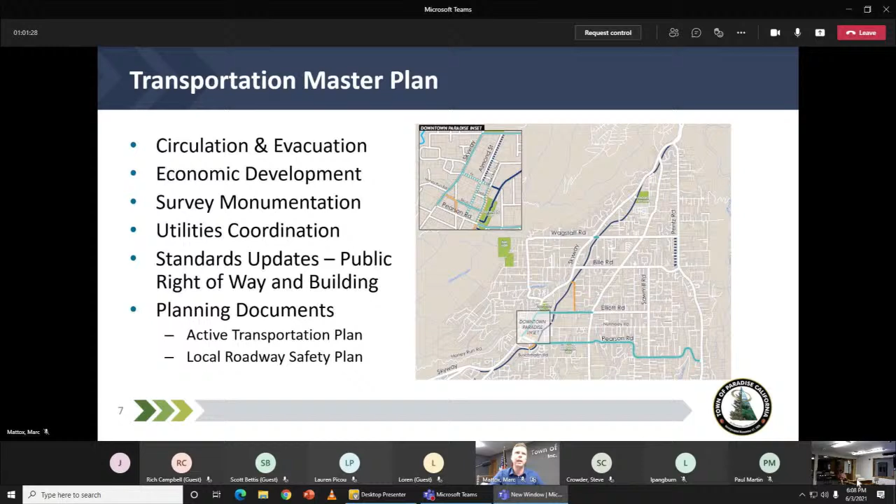Some additional scope of work we were talking about before the meeting started is that it's not just roads—there's so much that goes into economic development. We're going to have improvements for survey monumentation, get ahead of utilities coordination, update standards for both buildings and right-of-way, and create some very unique and critical planning documents that will further enable us to bring funding back to Paradise.

So at this point, now we have the long-term recovery plan and the EDA grant, and now I want to get into how our projects are delivered, and that really falls into two major categories. One is fire emergency response—what I mean by that is the projects it took to get the town open during evacuation, those critical 3 to 4 weeks of response, including culvert repairs, hazard tree removal, and other projects.

So that process isn't very simple, but it happens very quickly—that's kind of a unique process. And for everything else, there really are no shortcuts on how to deliver recovery projects and our standard projects.

So a lot goes into that work, starting with preliminary investigations, project approvals, conceptualizing the projects, performing appropriate environmental reviews for both CEQA, the California Standard for Environmental Review, as well as NEPA, the national equivalent, preparing design documents, plans, specifications and estimates, securing right-of-way—whether the town has adequate property to perform the work for that specific project—and utilities coordination. Our environment for utilities is more unique than anything I've ever heard of for an entire community, so we're navigating those waters.

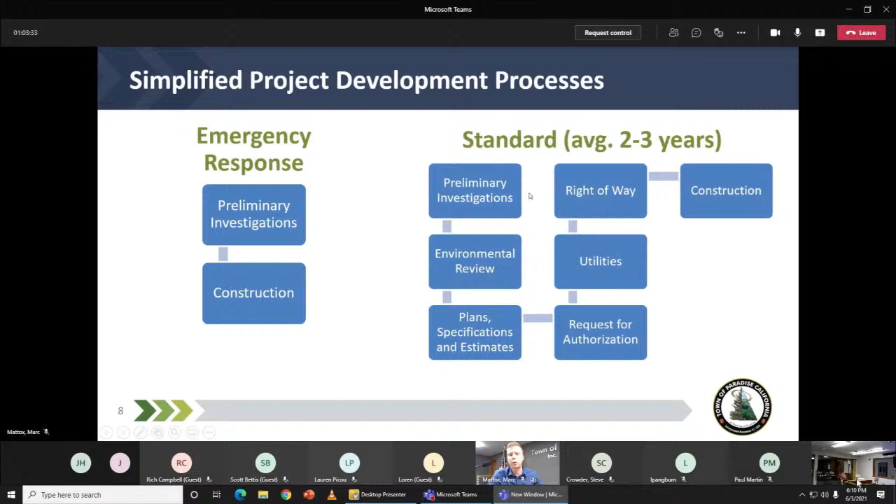Next in the presentation, I'm going to highlight our infrastructure projects, and I'm going to separate these into categories, only because it's easier to comprehend the sequence of how they were developed in a chronological manner: pre-fire, emergency response, permanent repairs, and recovery.

Pre-fire: Skyway at Black Olive signal. This was completed summer of last year, but it exists in our capital improvement program. This was a grant-funded project that installed the signal at the four-way intersection for safety, and we've been very pleased with the outcome of that project, and heard a lot of great responses from those turning left to and from Black Olive Drive at Skyway.

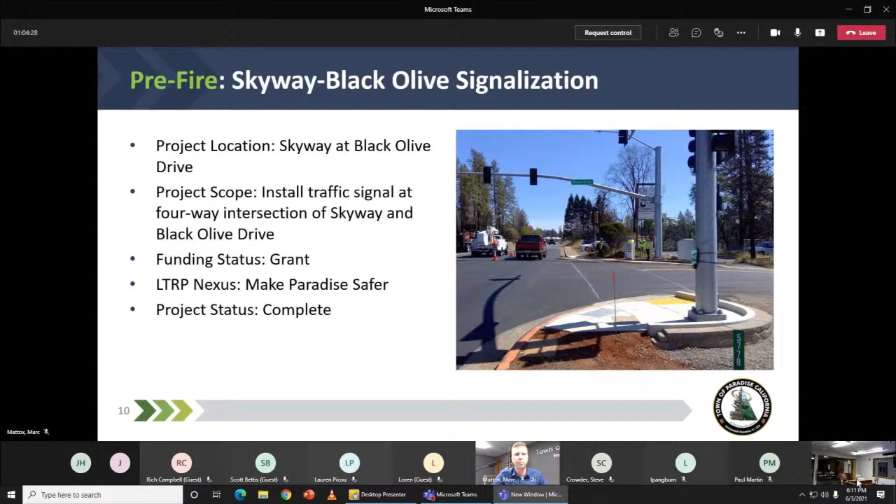Now to where we're under construction: our pre-fire Almond Street multi-modal improvements project. I don't love the name of that project, but I do at the same time, because so much is going into it. It's not just roads, not just sidewalks or lighting, it's all of it. This is the most complete project the town pre-fire would have delivered over the last 30 years. It's about $8 million with mostly grant funds.

I'd love it if you saw this on Facebook, we have drone footage, and I want to credit Rebuild Paradise Foundation for providing this video. We're so grateful for their efforts in the community and providing this footage, taking a bird's eye view of the project corridor for Almond Street.

It's all the way from Pearson to Elliott Road. As you fly over, there's not much activity at this point, but what we're really excited about is doing a few repeated flights as the project develops. I invite you to that vision of a complete street and infrastructure that supports a downtown and thriving businesses, and throw in a sewer, we're going to have something really special.

With this project, you can start to see coming into view the storm drain work, getting rid of those open ditches on the roadside edges. Once the underground work is done by the town — and we're so grateful for PID also coordinating their water line replacement effort — we're going to install sidewalks, curb gutter, drainage, lighting, landscaping, and bike paths. It's just going to be a really beautiful corridor and serve the town for generations to come. I love seeing all the green trees, I know we all do. That project's under construction, and I'm really excited for it to be moving forward.

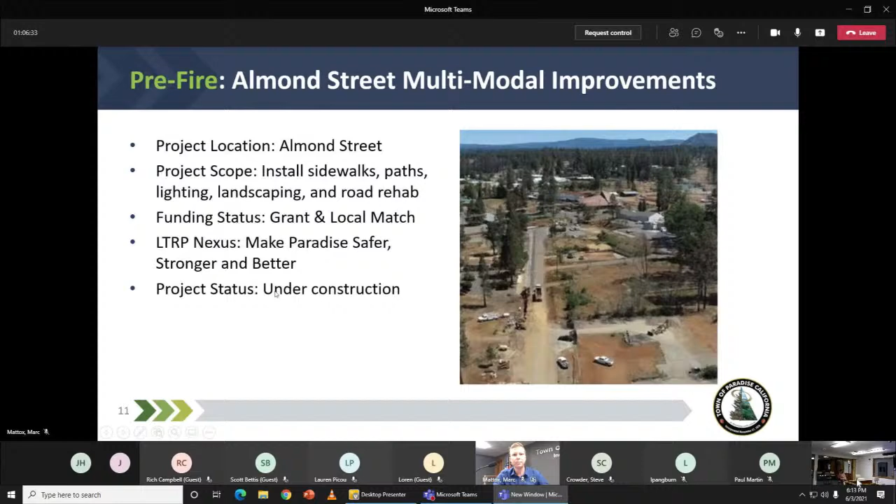Back to the presentation, I'll tie it in with the Paradise Gap Closure Complex. This is essentially filling in the gaps of that infrastructure. We secured Almond Street first, and as I said the other day in our Measure C or Measure V meeting, when good things start happening, it's easier to build and you gain this momentum. So pre-fire, on top of Almond Street, we were able to secure grants for Birch, Fir, Foster, and Black Olive in that downtown core for the same scope: sidewalks, paths, lighting, landscaping, and road rehab.

That's fantastic, again through grants and local matches. We're so grateful that the long-term recovery plan nexus still points back to making Paradise safer, stronger, and better. Both of those projects are under construction.

We're experiencing delays for reinforced concrete pipe, but we're still on schedule at this point, understanding that completion isn't contractually obligated till spring of 2022. But we've got great local partners in Knife River Construction, and their contracting subs on the job are aiming to get this done before the end of the year.

I'd be remiss not to mention Party in the Park is still on, and I hope you can join us starting the 16th. But expect some different landscape on availability for on-street parking. We're working on proposing additional gravel areas on the other side of Pearson Road near Joyland's Candies on the old Jeffords Building property. So we'll have a couple of different options, but be prepared, bring some water, you might have to walk a little longer than you normally would, and we'll have special designated ADA parking at the north end of the park in the gravel area.

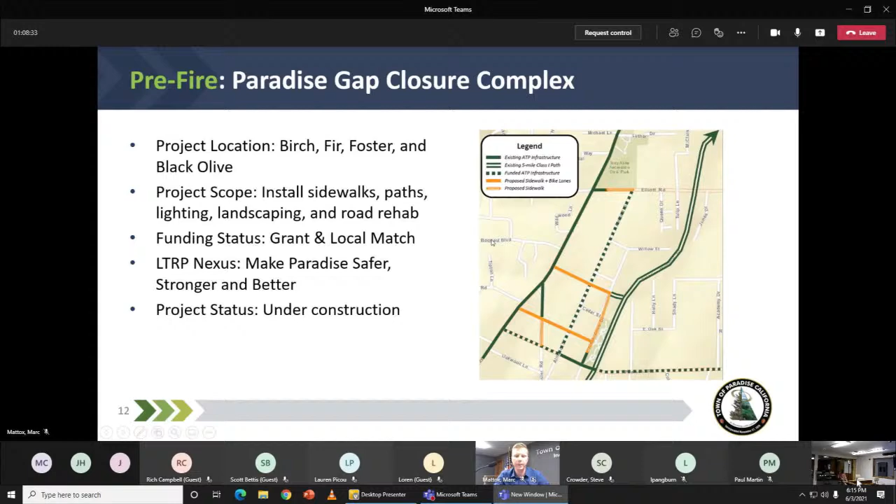Getting back to the projects under construction, our Pentz Road Safe Routes to School project, formerly known as the Ponderosa Elementary Safe Routes to School project. We're so grateful for this effort as well.

Another grant funded with minor local match, installing a multi-use pathway on the school side of the corridor. After the fire, to be quite honest, we weren't sure quite when this project would be delivered.

We're so grateful for the California Transportation Commission and Caltrans who stood by the town and said, you delivered this project on your schedule. We're here for Paradise. So it wasn't our first priority in getting this under construction.

When we were coordinating with Paradise Unified School District, they identified their intent to reopen this facility in a new and improved manner, with so much construction going on the school side. So it's really something special that we're all working towards for a grand opening later this year in August.

Both the town section in front of the school to be complete, as well as the school to have their work done on the facility, really welcoming those students and providing excellent education for our community and our children in the town.

What is also special about this project, I'll mention on the scope, is that multi-use pathway here, and you see this as kind of the first effort of widening in Paradise, and that's kind of a theme of things to come.

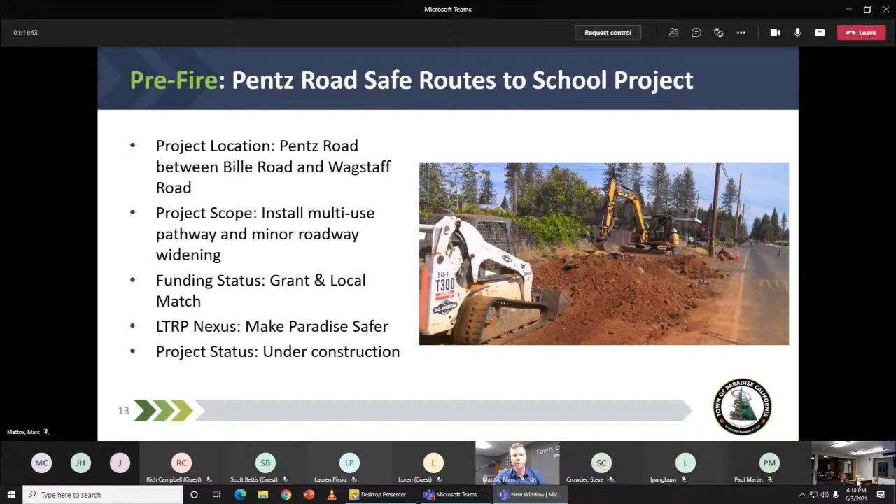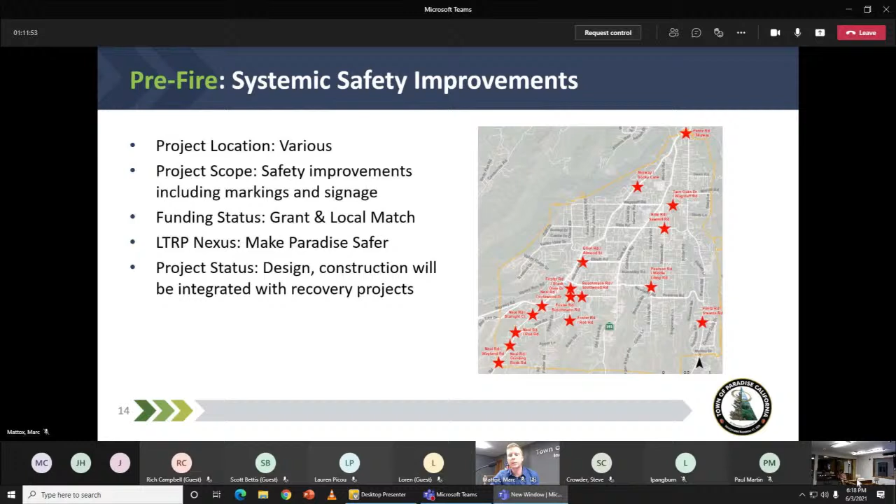I'll try and pick up the pace a little bit. This is a pre-fire grant, systemic safety improvements. We've got some signing and striping projects to deliver, and we're going to integrate those with other recovery projects for road rehab.

Okay, so we're getting to Camp Fire emergency response projects now. I'll talk about guardrails. Metal beam guardrails with wooden posts are combustible. So part of reopening the town was installing metal beam guardrails with metal posts, making those more resilient. Those projects are complete at the different locations through town.

Emergency response for culverts. We had so many culvert failures where we had plastic pipes. Again, talk about a lesson learned. When you have HDPE plastic pipes, those melt and are combustible.

We saw a lot of unique sequences of events unfold through the projects where it's really unfathomable to not know that it's possible for a pipe to completely melt underneath a 40-foot roadway because there was combustible material in the pipe or at the outlet or outflow of the pipe. That was very challenging, and we certainly didn't want the public traveling on those roads. There was a lot in that 3-week evacuation period, a lot of culvert repair work going on.

Signals at Skyway and Pearson, one of our only damaged traffic signals - a temporary repair was made during the evacuation period, and we're processing that with our insurance. We actually just had a great notification today that we are approved to move forward with repairs, get a traditional pole back in the ground, and take down this temporary wired situation across Skyway at Pearson.

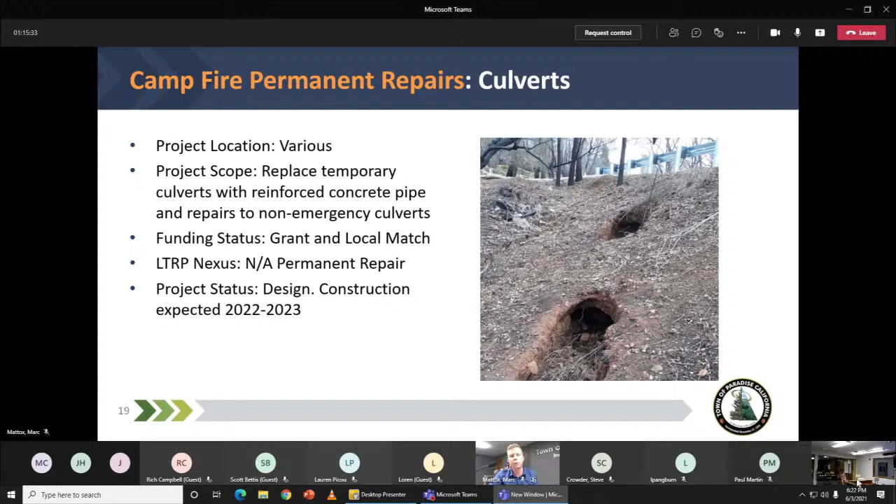Hardscape - again, if you live here, drive around, you know there's so much work to do and you're not seeing the progress. But a failed sidewalk doesn't rise to the emergency level, so we have to follow all of those normal design processes. As much as I'd love to get an excavator in there, rip it out, and put back brand new, especially on the Skyway corridor, we're not there yet. But the design, the processes, and the environmental review we have to go through take time - they're well underway, and I can definitely envision this project moving forward to completion in 2022 and 2023.

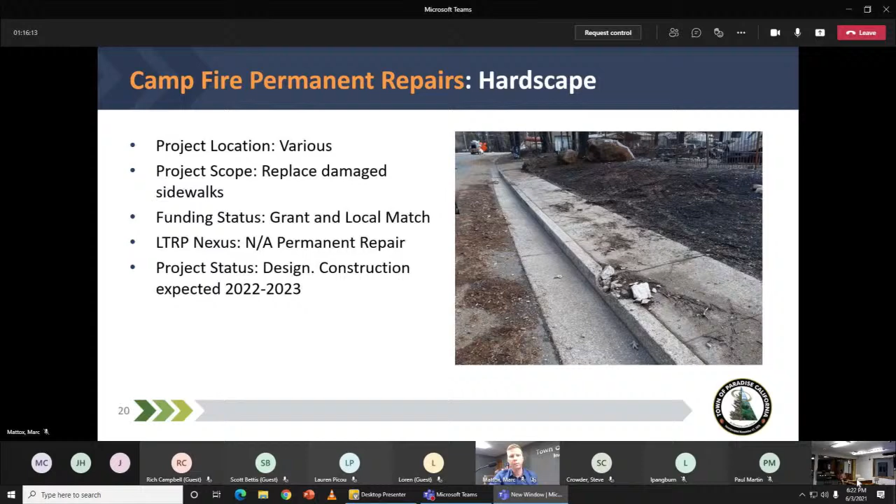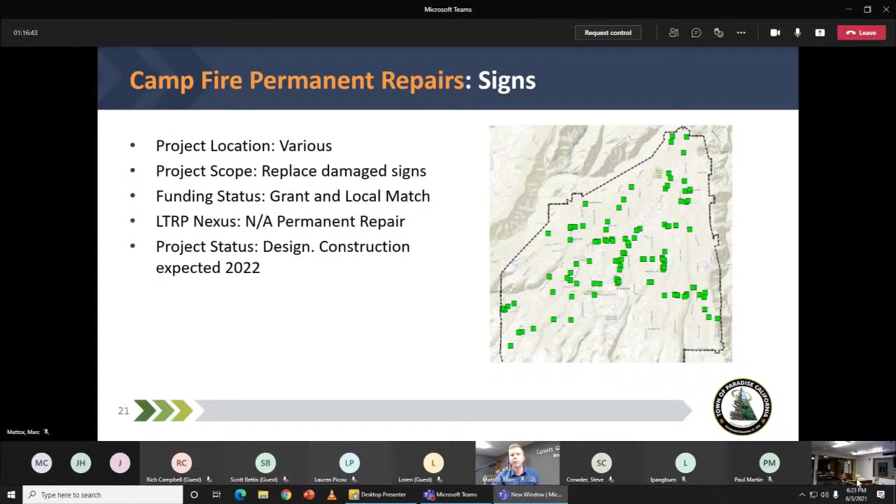Signs are another one. So many signs were damaged in the fire, and that's a project that's going to be complete in 2022. It's almost ready, and we have approval through Federal Highways to go ahead and start replacing the damaged signs. Obviously the critical ones, for regulatory speed limits and other regulatory signs, were replaced as soon as possible, but there's actually quite a few other supplemental warning signs that still need to be replaced.

The big one, the one I've been most excited about - if you've seen us at the community meetings, we could spend an hour talking about how great this project is. Due to some great forethought in the town's pavement management program, the North Valley Community Foundation took a chance on the town and provided a data inventory using lasers - literally driving a van with lasers, inventorying every crack on the road - with the great work from Mark Thomas, an engineering company that supported the town.

We were able to provide justification and really prove the damage to our town roadways - here on the left in the orange circle, for example, is a sample road in town where we collected this data in January of 2019, and then again collected the data for September 2019 as debris removal was wrapping up. With that data collection, we were able to provide irrefutable evidence quantifying the damage and impact of all the trucks, the fire, and the burn scars on the roads. So with that, the initial $25,000 leveraged early on with North Valley Community Foundation has yielded almost $77 million of total projects. We're really excited, as we have a plan to rehabilitate all publicly owned and maintained roadways to account for these Camp Fire damages.

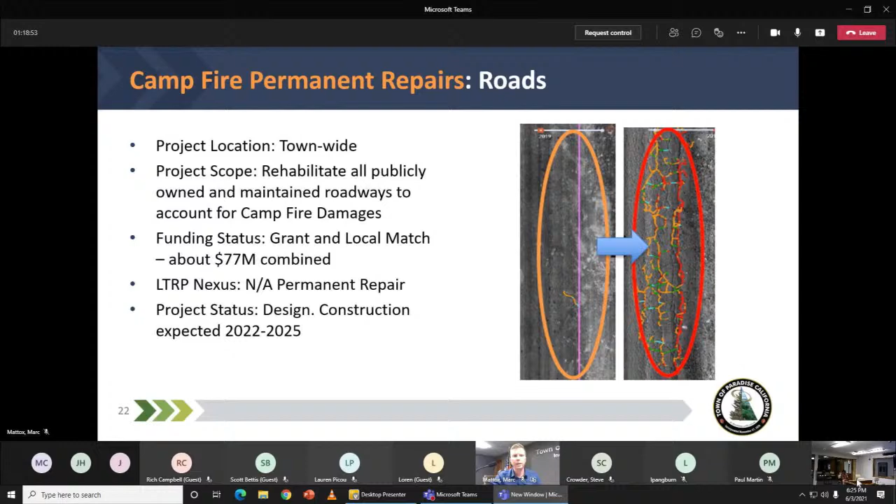Moving on to recovery projects I've developed further. I already talked about the transportation master plan. This plan will be crucial in guiding next steps, especially getting public input about priorities and our post-fire circulation and transportation needs. The overall effort for the transportation master plan will be complete in early 2022.

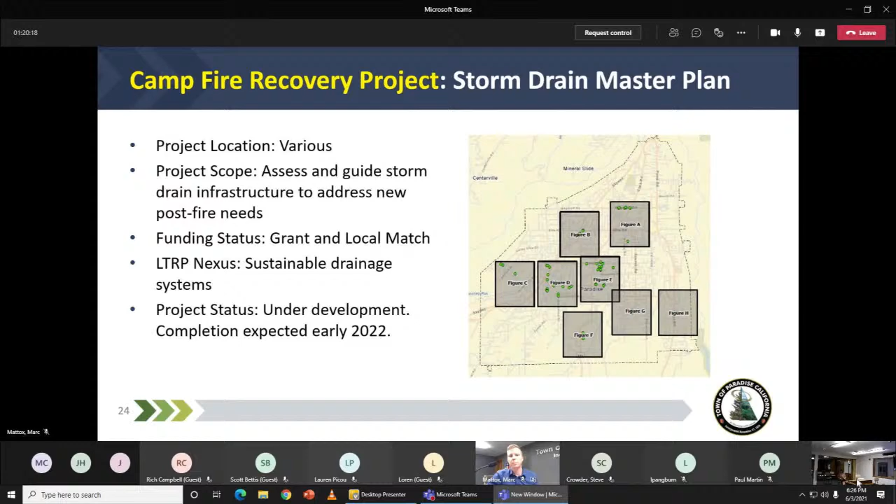We also received a grant for a storm drain master plan. It's not very exciting to talk about, but from an engineering perspective I'm really excited, because it will take a look at all of our storm drain infrastructure and make sure it's appropriately sized, and identify mitigation measures to implement improvements, to get rid of roadside ditches and have facilities that work. We know that in light of the fire, all our vegetation was burned, leading to increased runoff and sedimentation. This plan will take a comprehensive look at that and help guide projects moving forward, positioning us well to apply for future projects through hazard mitigation grant programs. Our goal is to finish this planning document and apply for construction funds.

Underground utilities is not a town-led project, but we're certainly a partner, and we're all in the community in this effort. Post-fire, PG&E announced their intent to underground all electric facilities in Paradise, and we're extremely grateful they heard the community's desire to remove wooden combustible roadside poles and put those facilities underground. That project is underway, and we're coordinating with PG&E regularly, working towards great progress to achieve the town's objective of having all utilities underground by the end of 2025.

Another project is our broadband study. There's no better example of how the world has changed since the long-term recovery plan than doing this virtual workshop, with people in person and remoting in from who knows where. We're grateful for this project, sponsored in part by the North Valley Community Foundation. We're exploring the potential of a municipally driven broadband service, which increases access and affordability of high-speed internet, with broad benefits for education, healthcare, and business in Paradise. That study is wrapping up, and we'll report next steps to the council and community very soon.

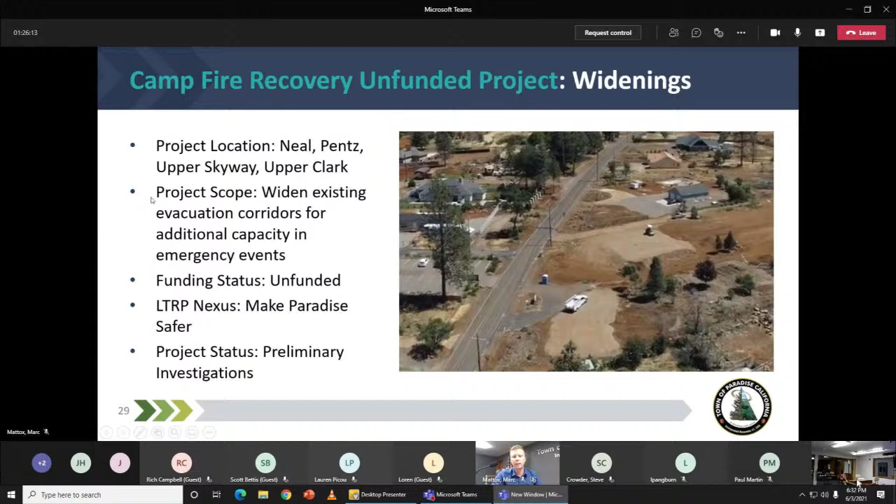Also, Roe Road Extension - our 1994 General Plan talked about Roe Road Extension, establishing it all the way back in 1994. This project was identified as a priority due to the lack of east-west connections throughout Paradise.

I think we can speak to it - it's hard not to draw everything back to the Camp Fire, but in the way that event unfolded, having an additional east-west connection for Pentz between Libby Road and Pearson Road would have been an invaluable tool to help clear that congestion and provide egress over to Clark Road.

So again, not a funded project, and I don't want to get property owners super excited here, but I want to inform the community that these are the types of projects that we're looking at, and we want feedback on whether you're hearing it the same way we see it - that this is still something that should be advanced in the development of the Transportation Master Plan.

Okay, so moving from there to thinking even bigger about something that could work on a daily basis in addition to the most extreme evacuation scenario - providing that redundant, more resilient evacuation tool regardless of where an incident developed, whether from the Butte Creek Basin, along the Neal Road corridor, or from the east. Having those east-west connections that tie in Pentz, Clark, Neal, and Skyway are critical. Interesting enough, this project has been developed, and I think we're working through it.

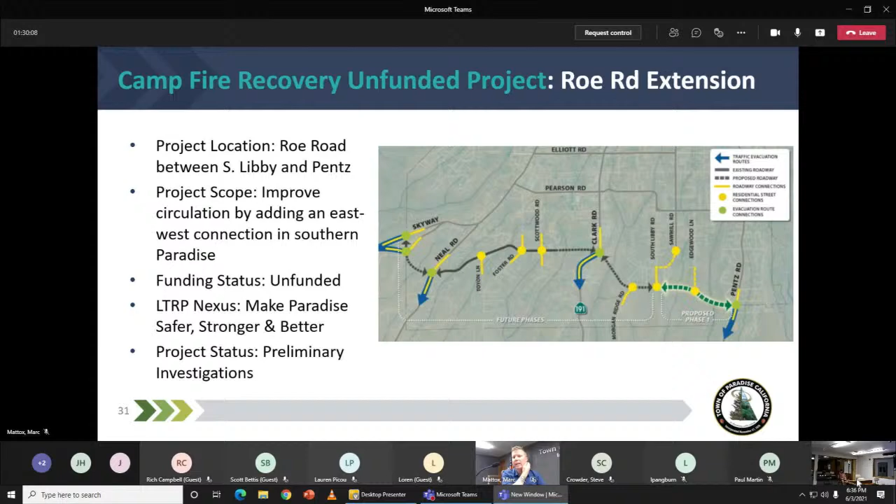Interestingly enough, in some recent research about the project prior to the town's incorporation, it looks as if a good portion, if not the entire portion, was deeded to the county. The alignment of this project was deeded to the county back in the 20s and 30s. So that was some really great developments that we're excited to learn about and explore further.

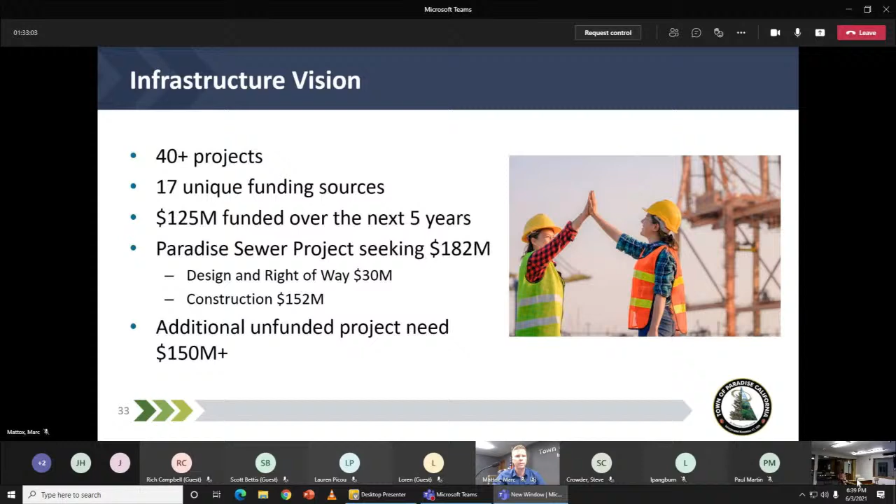And what that really means is that as much as we'd love to start building and paving now, we have a lot of work ahead of us to coordinate and time these correctly. Whether it's our own storm drain projects, PG&E, AT&T, Comcast, Paradise Irrigation District, we all have a role to play in the recovery and infrastructure, and we are going to do our best to coordinate, meet monthly, meet as frequently as we can, to strategize, plan, and create what we're calling a roadway paving checklist, readiness checklist.

Where we're going to identify all of these segments of town, all of town roadways between certain limits, and have this checklist, like I have on this slide, and say: is tree removal done? Yes. Is storm drain done? Is PG&E done? And once everybody signs off, what we're going to see on an annual basis is more and more streets reach that completion level. And what the town will do from there is say, okay, this neighborhood or this corridor or this cluster of neighborhoods is ready, and we'll go ahead and put those projects out to bid.

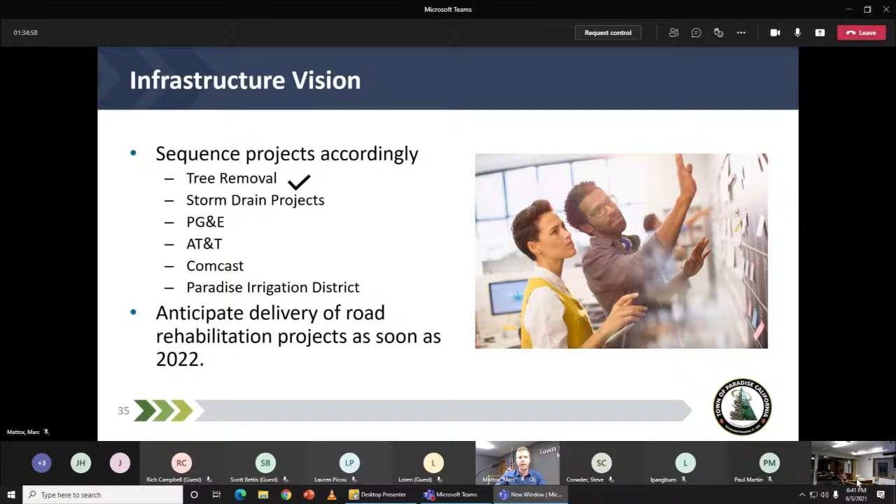We've got our infrastructure recovery update, that's here tonight. Our next one is going to be Tuesday, June 22nd, same format. I'm hopeful we'll get some good or bad feedback about how this is working for you. Our goal is to make this as accessible as possible, whether you're here in person, watching it recorded, or watching it live, so let us know how we can do that better. On June 22nd, the focus will be roadway and traffic evacuation planning. I touched on those efforts a little bit here tonight, but that meeting will have a much bigger focus on day-to-day needs and evacuation planning.

On July 15th, we'll have a workshop for downtown and Clark Road design standards. This is more focused on the economic development side of the house, for design standards for these corridors on both public and private property.

Our last webinar will be in early August, on August 12th, and that will be a focus on bicycling and walking network review. Again, making sure we're checking all the boxes of what you'd like to see as far as what makes sense on these bike paths and multi-use trails, where you'd like to see those connect, and what type of destinations make sense in your mind.